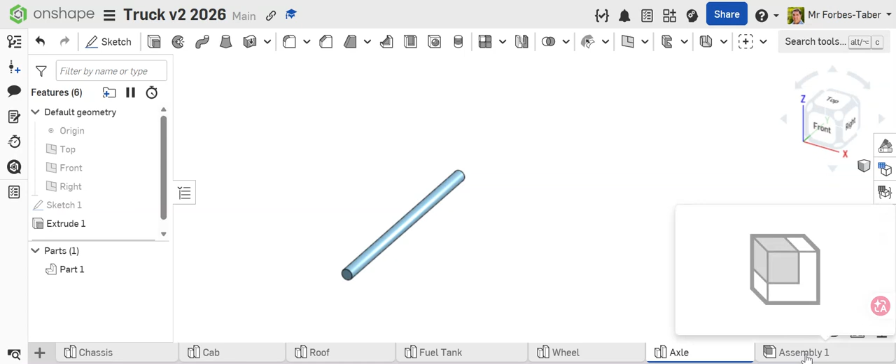Okay, so this is the part where we put all these parts together that we made in our last video, and we use a thing called assembly. So you should already have an assembly tab at the bottom. If for whatever reason you don't have one, you deleted it, whatever, you can always go here and go create assembly, but we should have assembly one here. So we click on assembly one. And the first thing that comes up when we go into assembly one is we need to go and insert all our parts.

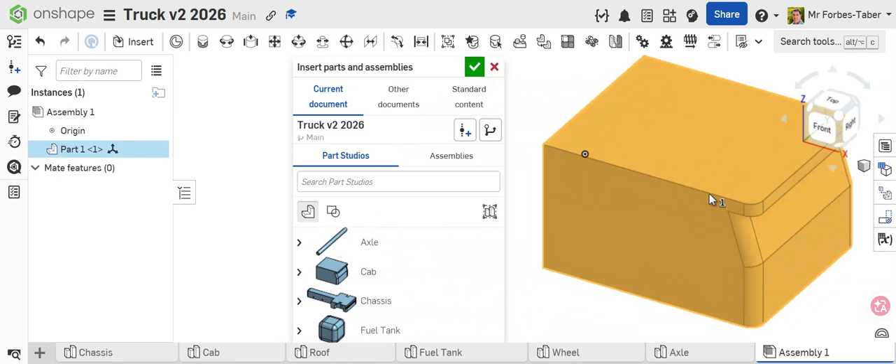This one's just taking some time to generate the preview. Doesn't matter. I don't like to bring all my parts in at the same time. I just like to start with something simple. So I bring the cab, I click on there and I place the cab. I'm going to zoom out so I don't overlap things because that makes it tricky. The chassis and 2 fuel tanks. And that'll give us enough to work with.

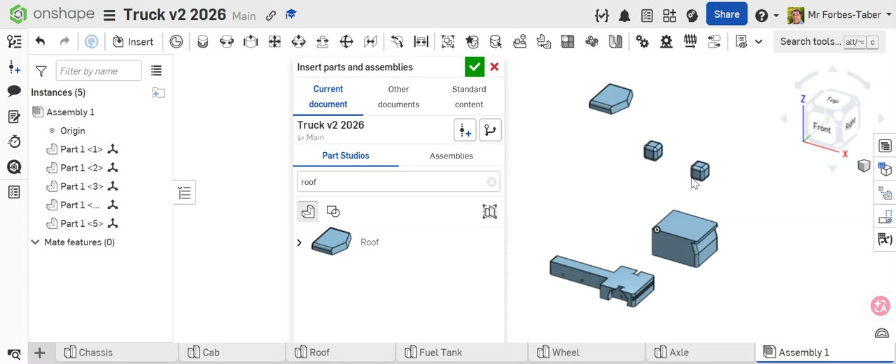Actually, why don't we bring the roof in, because that's a good thing to show you here. At the moment, I can't see where my roof is or my wheel is. They're there, but for whatever reason, the display isn't showing them because it's off the page. So we type in here roof, and it is there. So we just click there. So bring those 4 things in, your 5 things if you like, because 2 fuel tanks. Then press tick. Now, in here, we're mating.

Yep, not the awkward sense, just the joining sense. So all of these things are called mating. So if we click on a fastened mate, that's going to fasten something to another thing. Okay, and we've got to pick reference points. And the first thing you select is the thing that will move to the second thing. So that's an important thing because you don't want to move everything all the time in the wrong order.

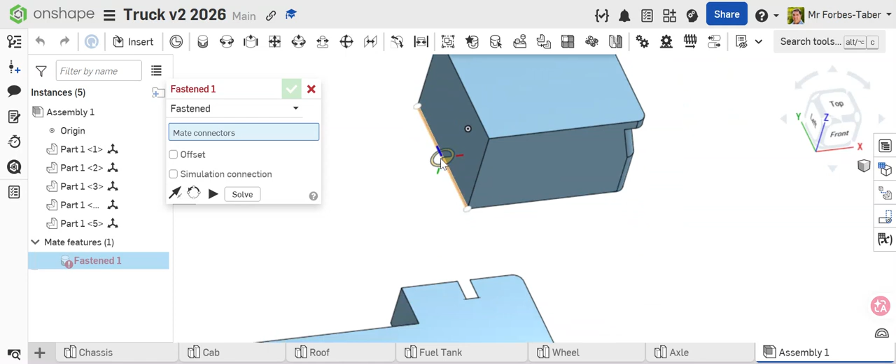So I'm going to move this cab to the chassis. The chassis is going to be the foundation for everything. So everything's going to be moved to that thing that's going to grow in process like a piece of Lego. Righto, so if I hover over this edge, see how I've got that mate looking that way. I can also get the mate to hover over a corner. I can get it to go that flat way. It really does not matter as long as you pick the corresponding point on the other piece.

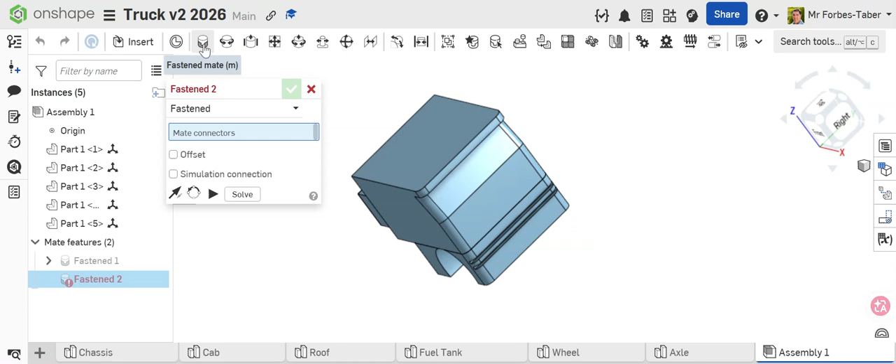So right now, there is no corresponding edge there for the back, but there is a corresponding edge here for the front. So if I click that one, and then I go and click this one, it will move it to that point. And I'd simply tick that as done. And I'm staying in fastened mate mode. So it's ready for me to fasten something else.

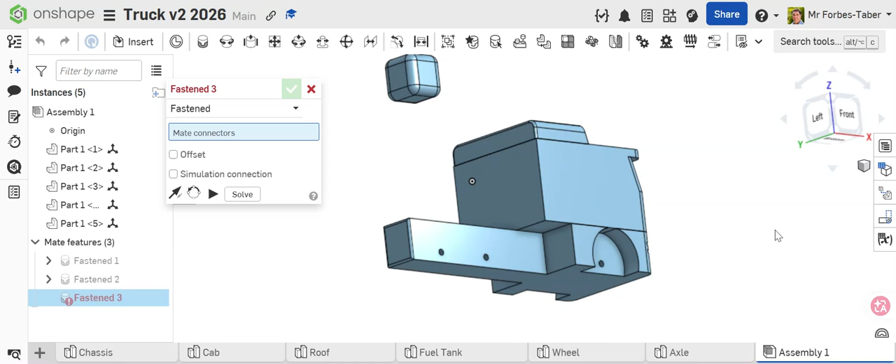Let's go and put the roof in this time. So the roof's over here. If I select that point there, that edge, so that fasten mate connector is right on the center of that edge, and I put that one there, I've now connected the roof. So that's pretty easy. The fuel tank's slightly different because you do have to select the faces facing the same way.

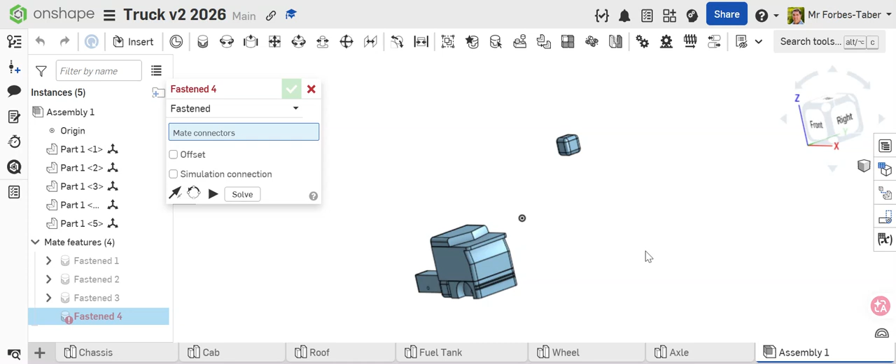So what I mean by that is you're on fasten mate. We're going to select this flat face, but we need to select the front of the fuel tank, and then we need to select the back of that spot there. All right, press tick. So turn back around again, select the front of the fuel tank, go back over here, select the back of that spot there. All right, so our fuel tanks, cab, roof, chassis are all together.

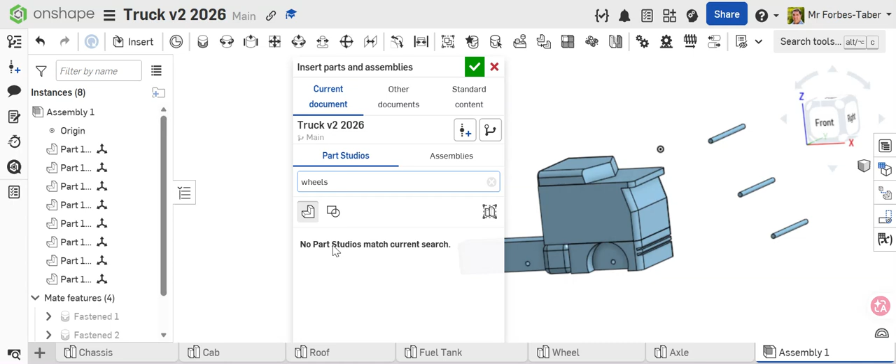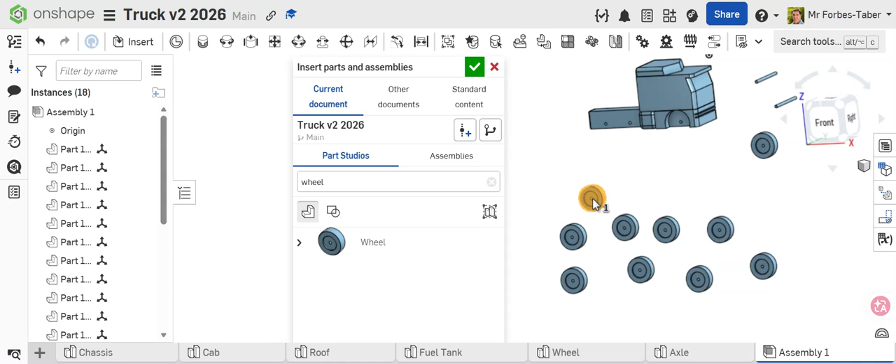And you'll notice that we'll have to change the direction of these wheels. We'll have to spin half of them around another way. So that will happen at some point. As long as you bring in 10 right now. How many have we got? 2, 4, 6, 8, 9, 10. All right, tick that. Let's go put our axles into position.

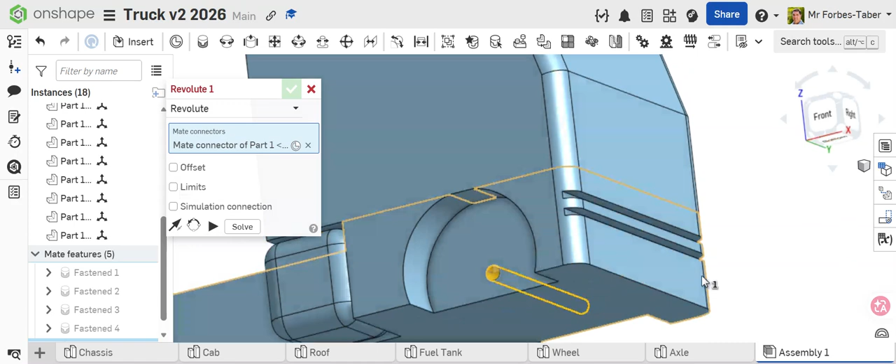So next to fasten mate is revolute mate. That's going to work well for our circular shapes. So revolute mate, we're going to select the end of an axle. Then we're going to select the end of an axle hole in the chassis. Now what that's done is it's put it in place next to that, like right on that line, but we don't want that. We want to offset it.

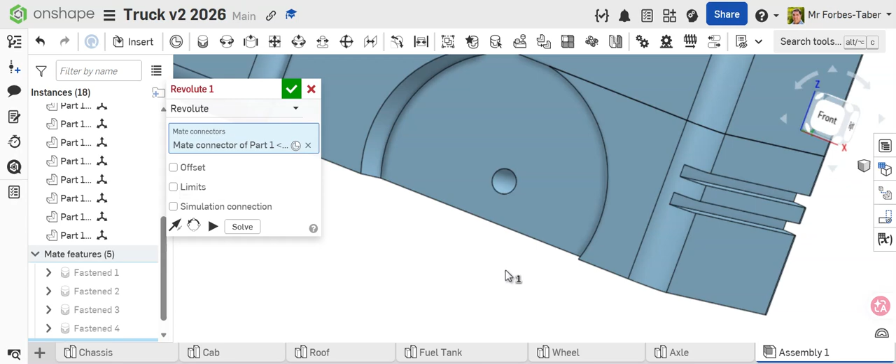So when I click on here, what will happen is, oops, sorry, for whatever reason my thing glitched out. Okay, click on there, click on there. Why are you not? I'm having a little bit of a slow connection issue. Don't worry about that. It is there. Now, what you'll see is that's flush with the end. We want to offset it so it's centered on the bottom of the truck.

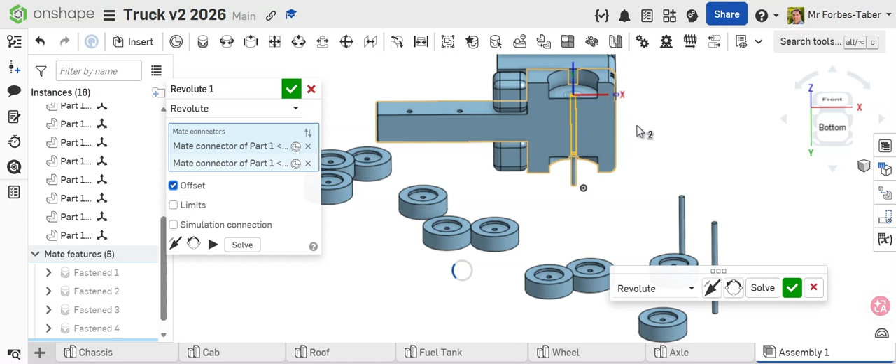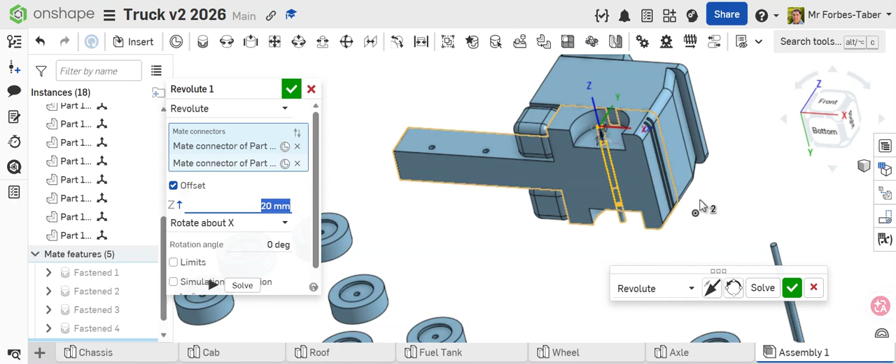So to do that, we click offset, and in here, so I have got a bit of a slow connection here, sorry, but it's catching up. In here, we've got a Z axis, an X axis, and there is a Y axis, and that's this way, the green one. The Z axis is the blue one. So I want to rotate, offset on the Z axis 20 millimeters. So that moves it up, and now that's perfectly centered because that was a 20 mil extrude.

Now we've gone 20 mil that way with our axle. Our axle's centered, so we can tick that. That's done. I've got to do the same for these other axles.

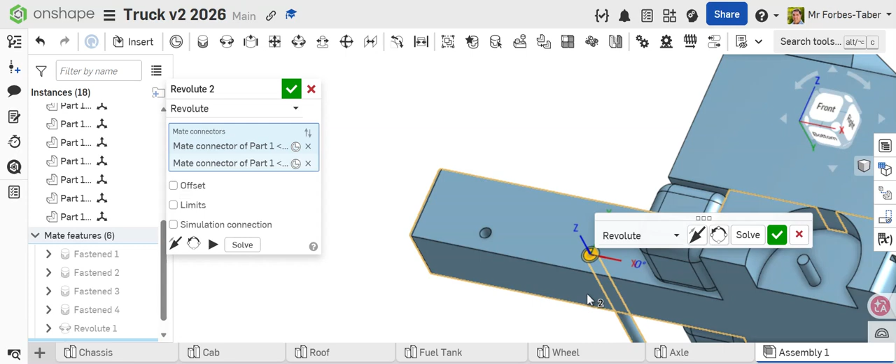So we use Revolute Mate, and we select the very end. Then we go over here and select the end of the axle hole, and you can see it's put it in. This time the offset's going to be a bit bigger. It should be about 40, because we extruded that chassis down 40 mil at the back.

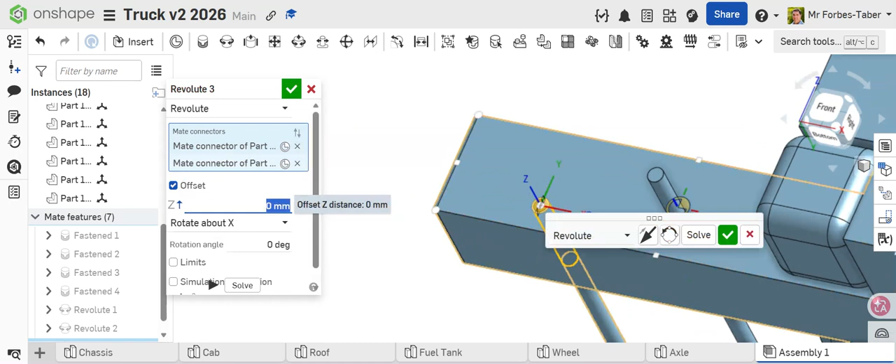So tick that one, and then do the same with your other axle there. Revolute Mate. Here we go here, and then we go offset 40. Enter, and that should be right. So our axles are in place.

The hardest part now is honestly putting the wheels on, which involves just a little bit of tricky offsetting. But we know how to do it, so I'm sure you can do it.

Now click that - we don't want to be revoluting these. We need to spin half of our wheels first. To do that, you can get into a view similar to this. Click on one wheel, you'll see this handle, and the handle will spin something. So if you click and drag that handle, you can spin it around. You want to spin it 180 degrees.

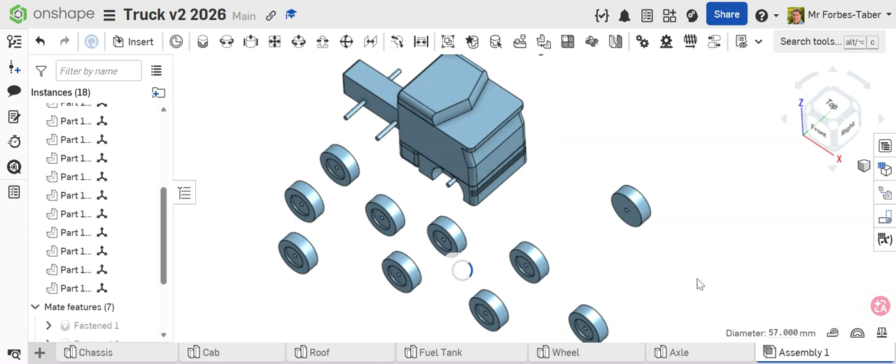You need to spin 5 wheels 180 degrees. All right, so once you've done 5 wheels 180...

degrees, sorry, 180, then you can start doing what we need to do next, which is put all these wheels on our axles.

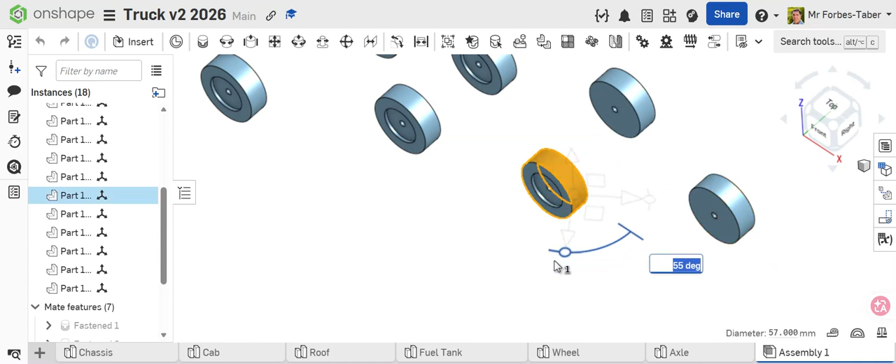And I've got one more to go. All right, so I've got 5 wheels facing one way, 5 wheels facing the other way. Let's do an easy one.

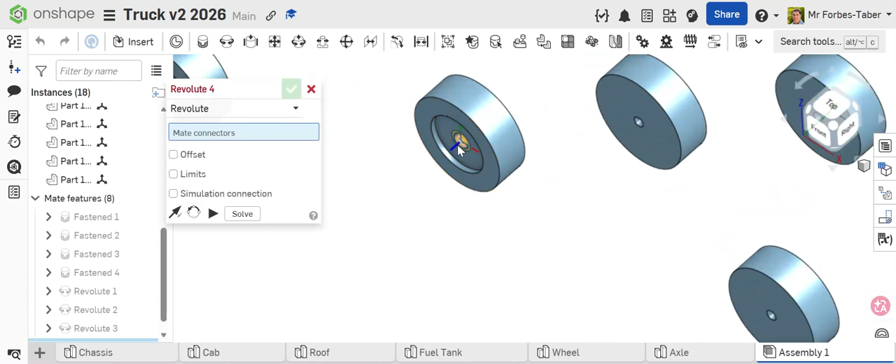The front wheels are easy. So we get a Revolute Mate, and we've got to have a wheel facing the right way, so the rim is to the outside at the front. We select the middle point as our mate connector. Then we go over to the axle and select that point, and that's done.

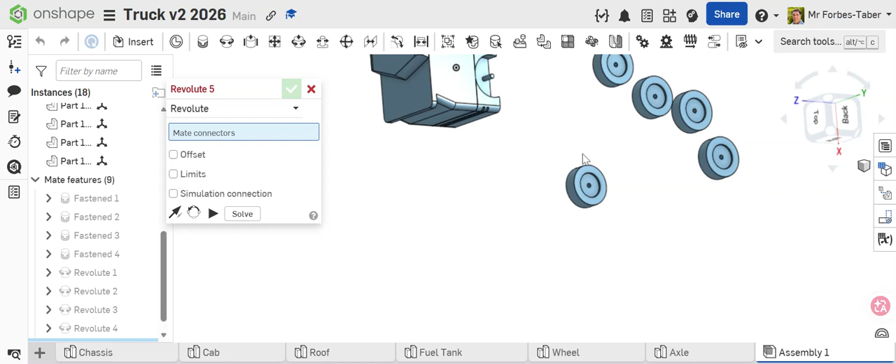So our wheel is going to be just sticking out a little bit because that looks cool. All right, we can do the same on the other side. So we spin around and get a wheel that's facing the right way. If this is doing your head in, I'll move it around that way.

So we get a wheel that's facing the right way. We select the middle axle hole. We select that point there, and we tick. So we've got 2 wheels on.

They're easy, they're good. However, the trickier ones are these ones. You need to make sure that you've got a rim - so this is the rim. We'll call that the rim, the little setback.

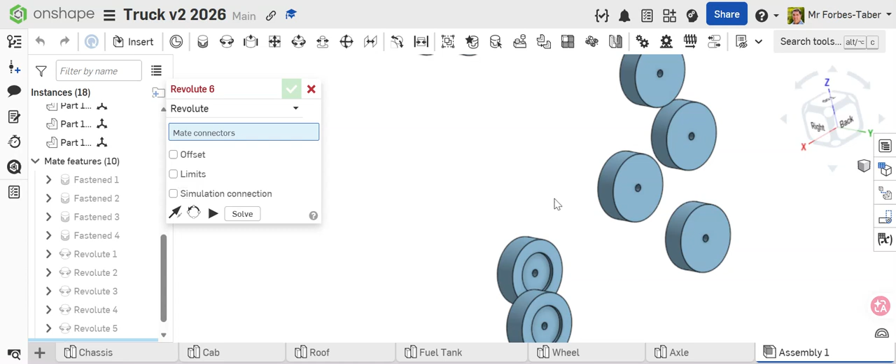You need to have a rim facing inwards on the first 2 wheels here, and then a rim facing outwards like this on the outside wheels. So you just need to get the direction right.

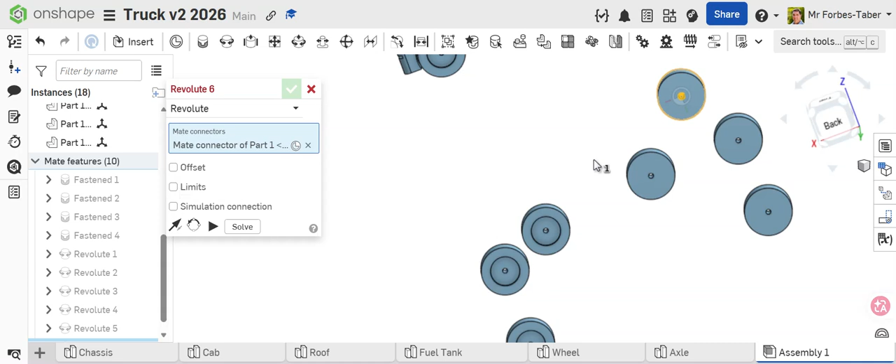So Revolute Mate again - we're going to put this wheel, think flat to flat, so that's a flat surface. And then the next flat surface that's going to go next to it is on the back of that other wheel here. All right, so we're going to Revolute Mate.

We've selected the middle of that wheel, we're going to click over here. Now what we'll see is, actually I'll go to the bottom view so you can see that's flush there, but we've got to move it over here. So this is where your offset gets a little bit tricky - it's the Z axis, we've got to set that back in.

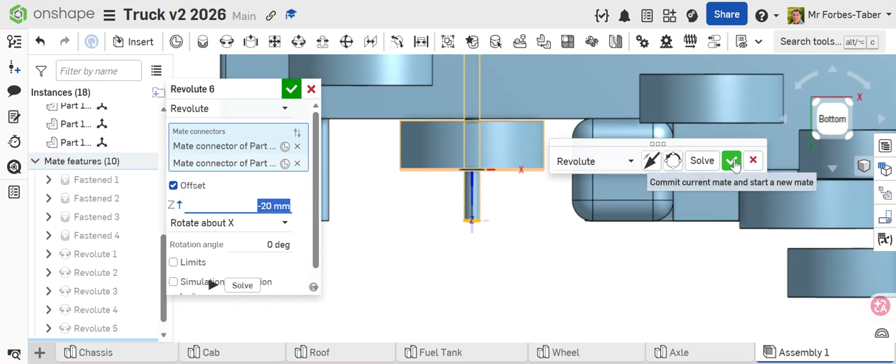Now we'll try 20, but see how it went the wrong way? So now try minus 20, and it'll push it the other way. So that might happen to you - it does depend on your machine and how it's set up, but negative 20 or 20 will work. All right, tick that, so we've got to do that to all these other wheels.

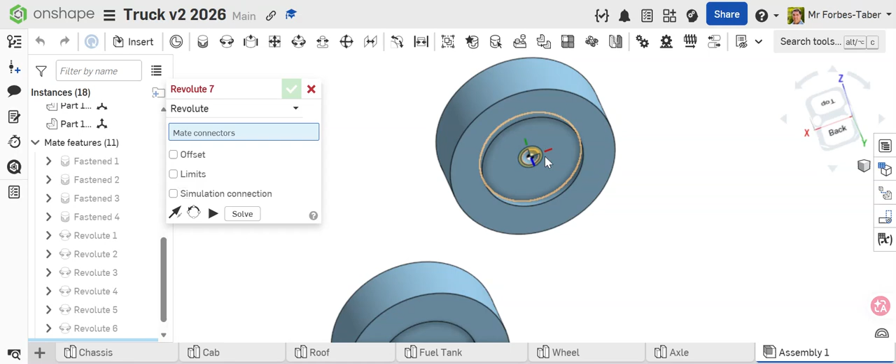So I'll quickly do that with all these other wheels, but just make sure you've got a rim facing in. Then once we've done that to our other wheels, we're going to put this wheel with the rim facing out in here again, using Revolute Mate, we select the middle there.

Then we go here. Now, when we look at this, you might think that looks all right, but it actually isn't. We need to just step it in a little bit - we're just stepping it in about 2 millimeters. So an offset of about 2 mil should bring that in nice and neat to where we want it.

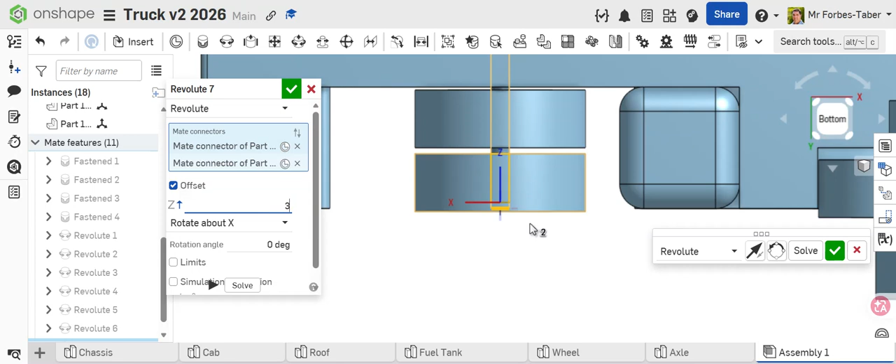You could go 3 mil if you want, and that'll have even 1 millimeter gaps here, and everything will be in line. I really don't mind what you want to do - 2 or 3 mil will be fine. I'm going to leave mine at 2.

All right, so that's our back wheels. And I could go and do all of the other ones, but I'm not going to waste your time on this video. I'm going to go straight to another one that's already done so you can see what they're supposed to look like.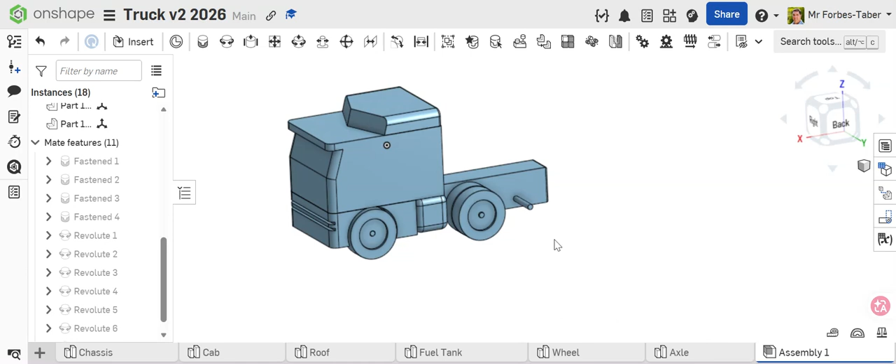So back in here, if I go to this truck one that I've already done before, you'll see that our wheels are offset. These ones are a little bit bigger than what they were, so that one should be set back in a couple of mil. But yeah, your wheels should all be facing the right way, okay?

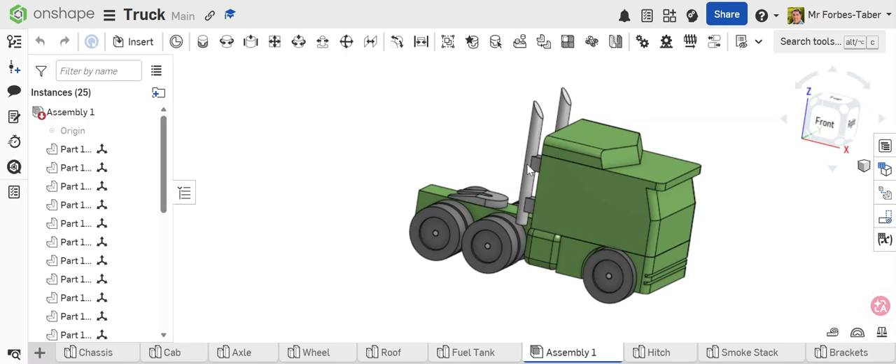In the next video, I'll show an extension task on how to do the smokestacks and brackets and the hitch.